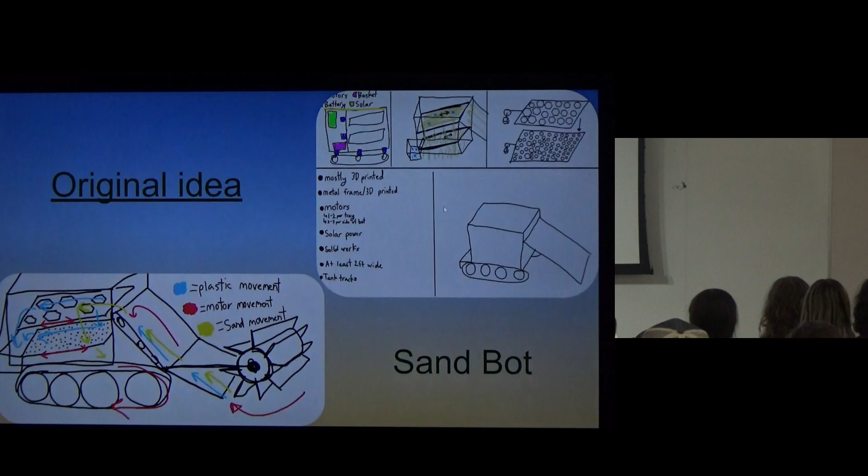This video, at the beginning of the school year, I found it on Instagram, and it was just really inspiring because I saw just how much plastic is in that, and I also found the fact that 100 million marine animals die each year from plastic waste alone, and most of that is found on the beaches before washing into the ocean. So I wanted to have a solution that could help with that.

So my original idea, I wanted to call it the Beach Bot, but that was unfortunately taken, so I wanted to name it the Sand Bot, and found that Trash Turtle was even more catchy. But originally I just wanted the idea to have a fully working robot that can drive on sand and pick up trash while dumping and leaving the sand behind.

I wanted to make it as easy as possible and least harmful for the habitat. I also wanted 2 shaking tables. My initial idea was to make 2 shaking tables that would shake and have the sand fall through while the trash goes into a bin later, but that changed.

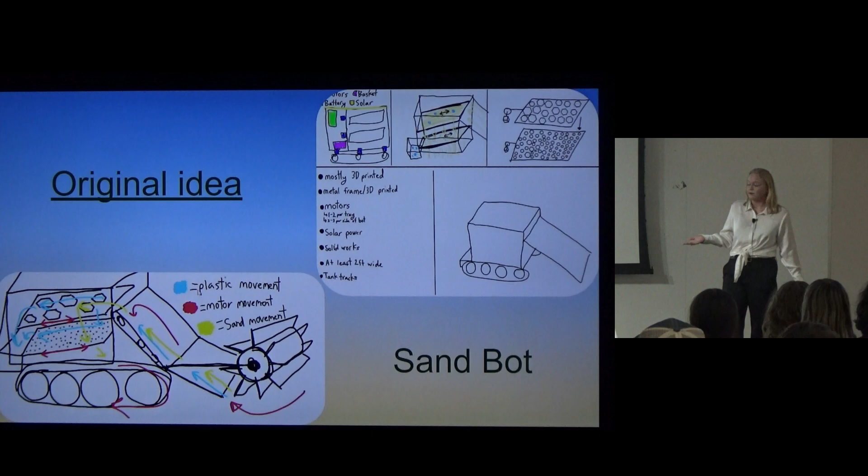So my project objectives: I wanted to build a working robot, obviously. I also wanted to learn SolidWorks and learn Python and also Arduino, because that was what I was going to be using. I wanted to build relations in the engineering and conservation world, and I also wanted to raise awareness for plastic pollution, which is what I'm doing right now as I'm talking to all of you guys. I also just in general wanted to work on my engineering skills. Even though I'm going into a marine biology major, I still want to have that aspect still in me.

Some of my research goals: again, I wanted to relearn SolidWorks, learn how to better use it and be more effective with it. I wanted to learn Python and Arduino, as I knew very little at the beginning of the year. I wanted to learn about habitat harm and how I could build a robot that would cause the least amount of damage to the habitat while still getting my goal done. And for most of the year, I spent researching suspension.

So my biggest problems: first of all, the sand, from it getting into motors and trying to find motors that could fit and have sand not get into them, to gears and shaking tables and making sure that the sand doesn't get stuck in that. Also the weight of the sand, or the weight of my robot on the sand, and making sure it can drive around while still doing that. And also just the bumps and getting over the bumps in the sand that are naturally occurring.

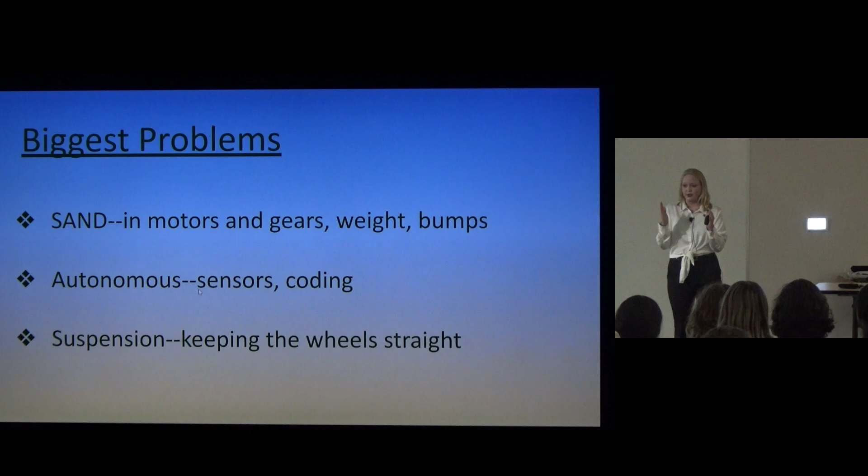Also autonomous: if I wanted to use sensors, if I wanted just to code an area for it to go around on, or if I wanted to use a joystick. And then my last biggest problem, that was actually my biggest problem throughout this year, was the suspension. Everything about it, from keeping the wheels straight so it can actually drive, to also making sure I can bear the weight of my robot.

So before, I needed a panel of advisors. My first one was Matthew Beaker. He works at Hyster-Yale and is the Director of Global Emerging Technology Products, and he's an electrical engineer major. I also have Mr. Barker, our robotics and engineering teacher at Grandview, who's also our VEX robotics coach. And then there's also Kevin Roethe.

He's an electrical engineer... he's my father, I should know this. He's also a general in the Air Force. He has done MIT AI coursework, and he coded a navigation system.

I also needed support advisors for this. I had Danny Diaz, he's at the School of Mines, a mechanical engineer who's very good at computer science. There's Corey Patheeks, a grad from University of New Hampshire, a marine, estuary, and freshwater biology major. And there's also Gwenny Dubenhugger, my German exchange student and sister, who's my emotional support buddy throughout this whole thing.

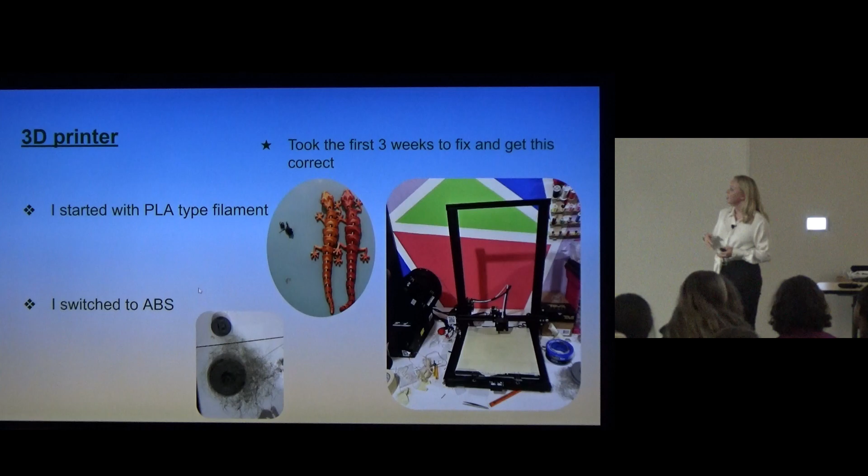But I didn't want my project to be rainbow, and I didn't want it to cost that much. So I switched to ABS, and as you can see in this lower image, it was absolute chaos. I did a little research, tried a bunch of solutions, and found out it would be better to just switch back to PLA.

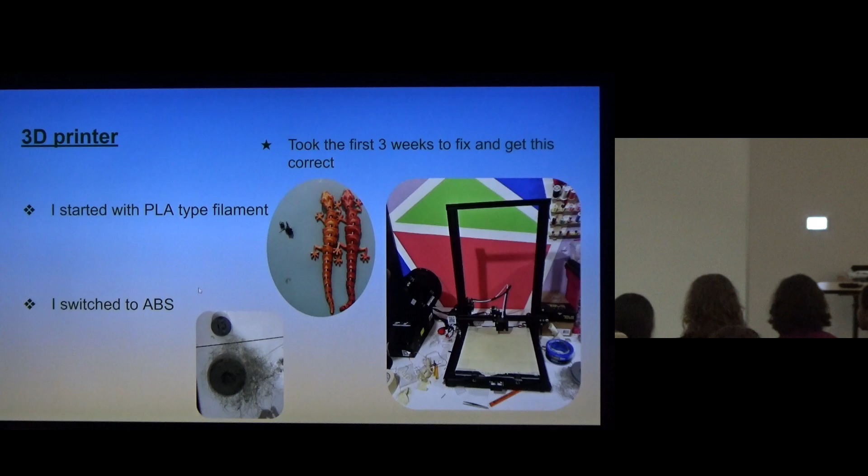So I got some PLA and did a little more research. I leveled my printer, taped it, and put Elmer's glue on the bed to help it stick, and it ended up working pretty well.

Around that same time, I was also researching suspension. My idea was to go off the remote control car I have at home, with two arms and a shock absorber to help make sure I could bear the weight while still going over bumps.

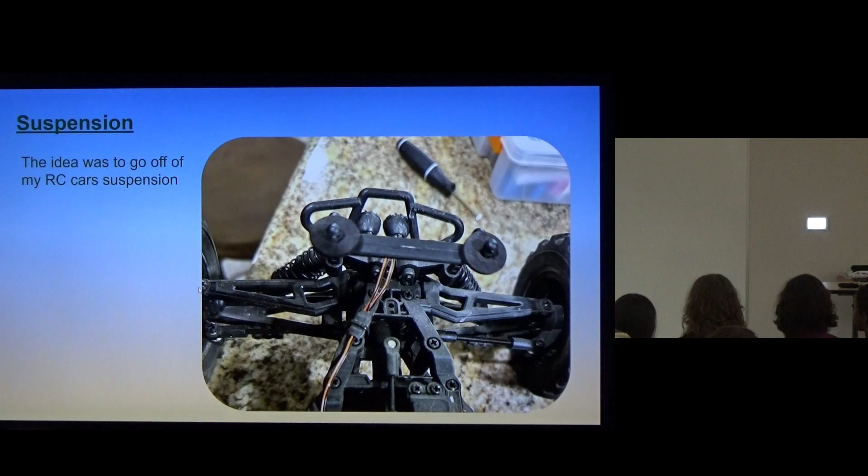So I got some initial objects to work with. I got my initial wheels with a lock nut in them, and the shock absorbers, and I went to order these arms. I wanted two for each one, but I ordered one pack, and when I went back to order another, they disappeared off the face of the internet. I could not find them anywhere, so I had to do a little figuring out, which I'll show in the next slide.

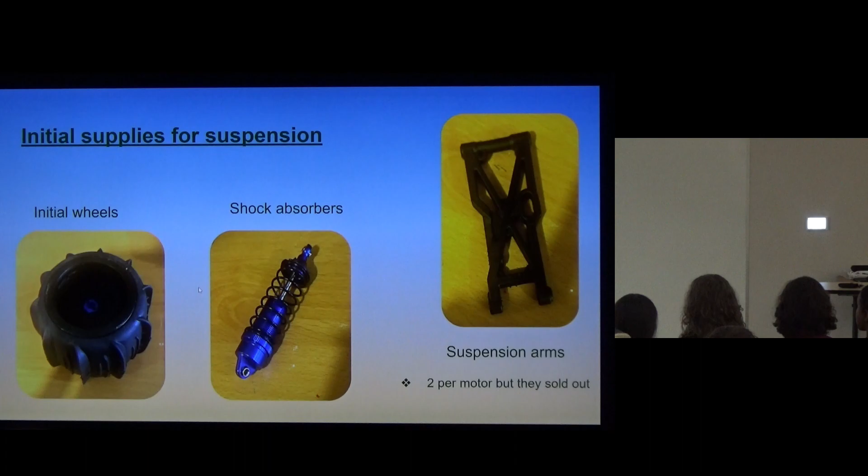I was also working on SolidWorks. I had to relearn it, and I wanted to work on the part that could hold my motor, which is right in the middle and not a great place to connect. So I had to create something that could hold the motor and connect to the suspension. My first attempt was way too thick, but I was just messing around with SolidWorks to see how it would transfer and print onto the 3D printer.

Then I went on to my second attempt and made it much thinner, and I quickly realized I needed a second point to attach a second arm to make sure those screws were level. So then I went to my third attempt, with two suspension arms, but this is when I found out I could not order the same part twice because it was gone. So I went to the final version that is actually on my robot right now, to attach to the part I did end up getting.

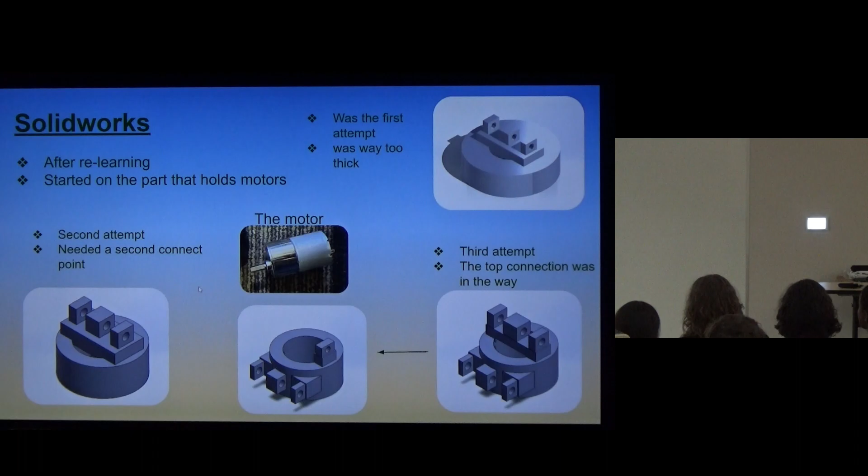So this is my initial idea for the suspension. You can see I have the shock absorber, the one arm, and that which would hold my motor. And I ended up needing a second arm, like I said.

Around the same time, I was also building my frame. I was using VEX parts because I was part of the VEX team, and I was comfortable using those parts, and also they were easily accessible at the school. I quickly realized it was also very heavy, so I needed to print almost everything else.

I also went ahead and prototyped a part for the shaking table, and knew the idea that I wanted, as you can see there.

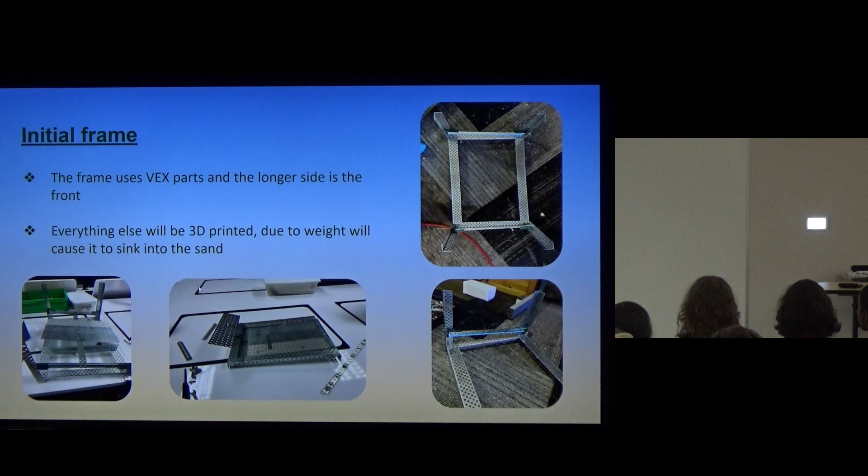Around the same time, I was jumping around a bit on my project. I was also working on the wiring. I soldered a control panel to one of the motors, attached it to an Arduino board, and got that connected to a little joystick just for testing, connected straight to the Arduino board.

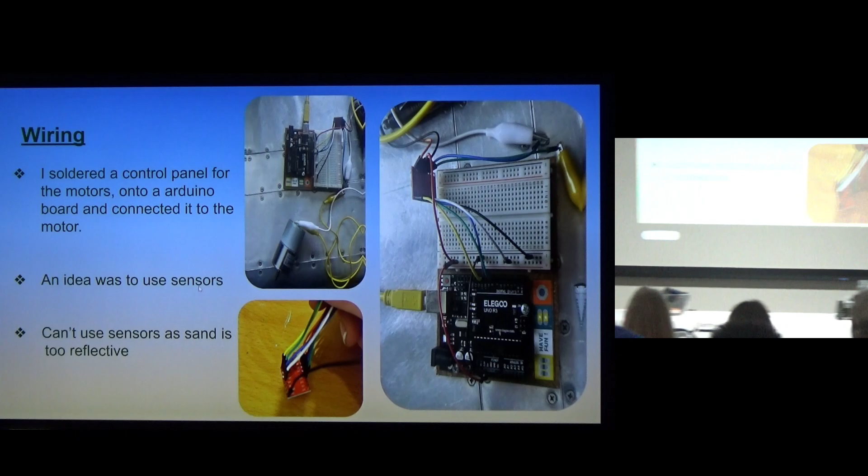I also had the idea to use sensors, so I didn't have to drive the robot around and be there. But after talking to my advisors and some research, I found out sand was very reflective, so I couldn't use any vision sensors since I'd get bad input. I also considered using GPS, but because it was the ocean and by the beach, the tides and other aspects like humans would get in the way and run into that or into the ocean.

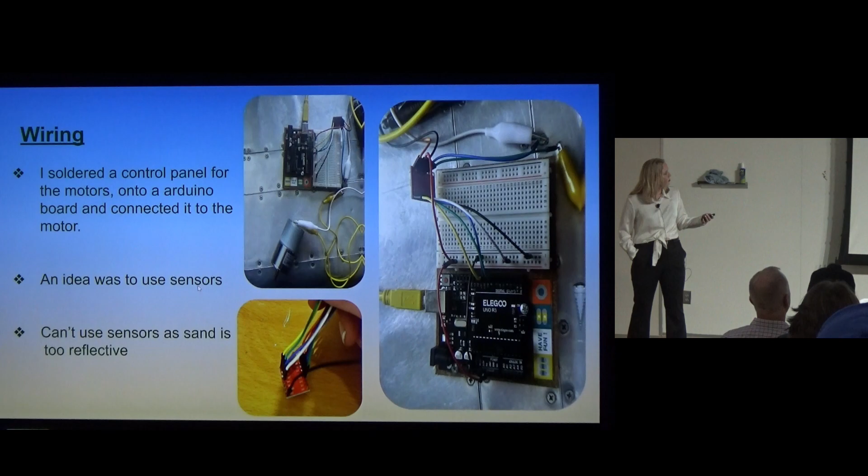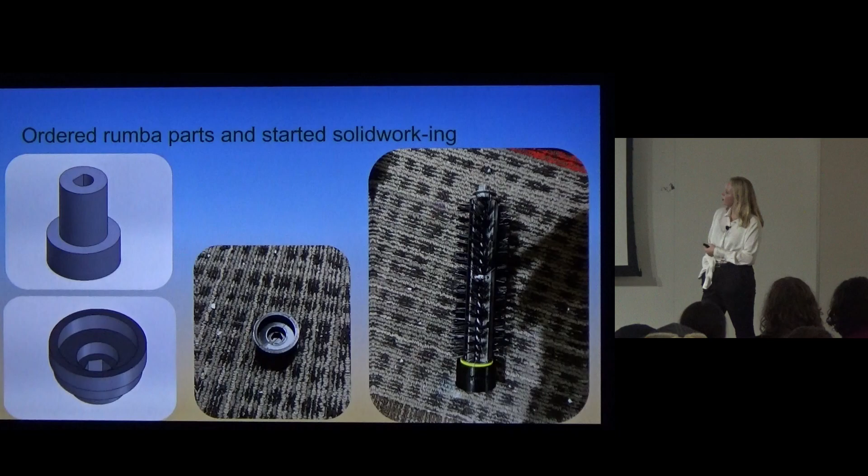Okay, don't pay attention to any of that. You saw nothing. We'll get there, there's a lot of slides here. Don't pay attention to that part. I think I was actually here.

So then, ignoring that, I went to go test it, and you can see it's moving just forward and backwards, and I was just using a little joystick.

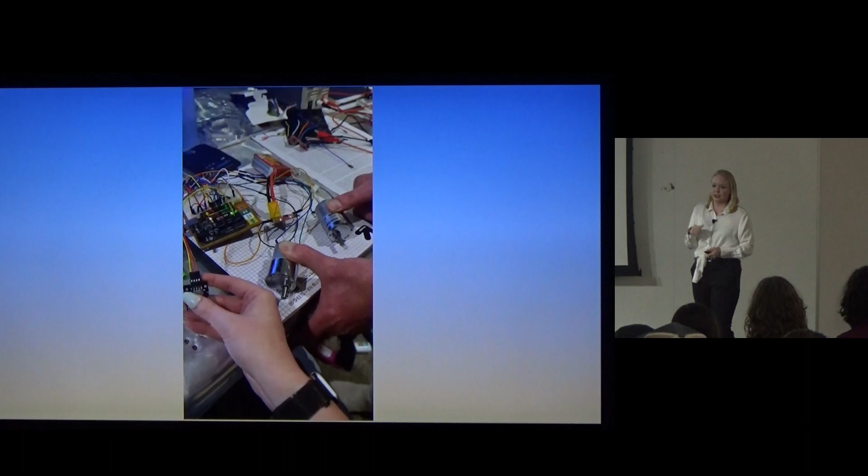Then I attached three more motors to that, and attached control panels that connected it to the Arduino board, and put it all into the suspension. As you can kind of see here, the suspension is bending inwards, which it's not supposed to do. It's supposed to stay straight, but that was another one of my big problems.

I went to go test the motors, and as you can guess, it didn't go too well. I decided to test it on the metal frame, and without thinking, I didn't take the bottom off my power distribution board, and I connected that battery straight onto the metal frame and caused it to short circuit. So the entire thing went up in smoke.

I quickly unplugged it, had a little panic attack, thought about it, and re-soldered a power control board because that's what I thought was broken. Then I went to go test it with the same exact battery, and like expected, it didn't work.

So like any normal human, I went into my room, had a quick mental breakdown, and while staring at the wall, I thought about it and realized I saw smoke coming off the battery too. So I tried a new battery, and this is what happened.

As you can see here, the motors were moving left and right, forward and backwards. You can also see I was a little scared about it touching the metal again, so I taped the entire thing. You can also see the motors are a little wobbly, but I went on to fix that in a later slide.

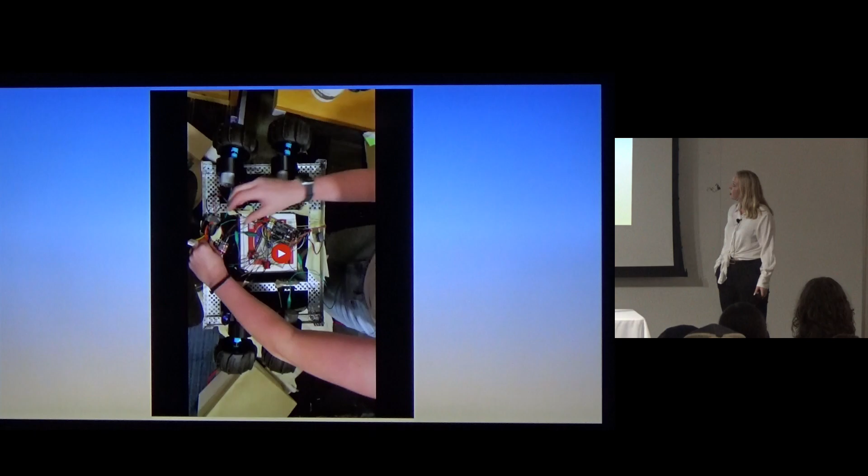So that was around midpoint, and I ran into a lot of problems. First of all, the frame wasn't big enough. The suspension ended up taking way too much space than I was originally planning, and I needed something bigger to actually have a shaking table or whatnot.

It also looked really messy. It was my first prototype, I was just kind of tinkering around, and it ended up looking pretty bad for a capstone project.

And also, as you saw in the previous slide, the suspension was not level. They were all tilted inwards, which would cause too much tension on the motor, so it wouldn't actually move it. Then there was also the logistics of the shaking table and getting sand in those joints and it not being able to work.

So then I came up with a brilliant idea. If I was going to call my robot basically a sand Roomba, I should maybe use some parts of a Roomba. So I didn't actually need a shaking table, I just needed something to sort plastic from sand. I got the idea off of a Roomba, I just needed enough brushes that the plastic would stay on top and the sand would fall through the brushes.

So I went ahead and got an actual Roomba brush from a Roomba, and I SolidWorks some parts. The top one connects to the top run right here to the motor so it can turn, and then I also connected this part right here to the bottom, as you can see in that lower picture, to hold that to the frame while it spins. That was actually my first part that I measured, printed, and got all of that done on the first try, and it fit perfectly without a millimeter to spare.

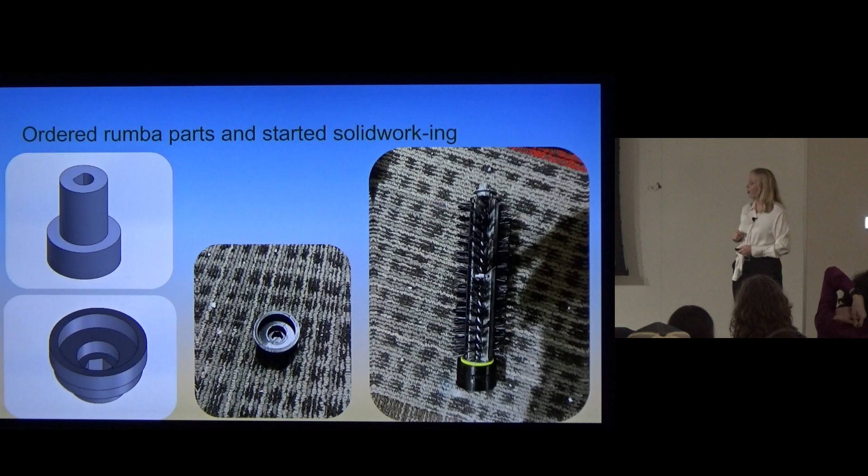I also built new suspension holders because at that point I was connecting the suspension to the robot with jewelry wire, which was not a great idea. So I 3D printed some other parts and attached them to the robot to make that suspension more stable, and got it to stay straight by keeping the two arms parallel with each other, which was a big problem at the beginning.

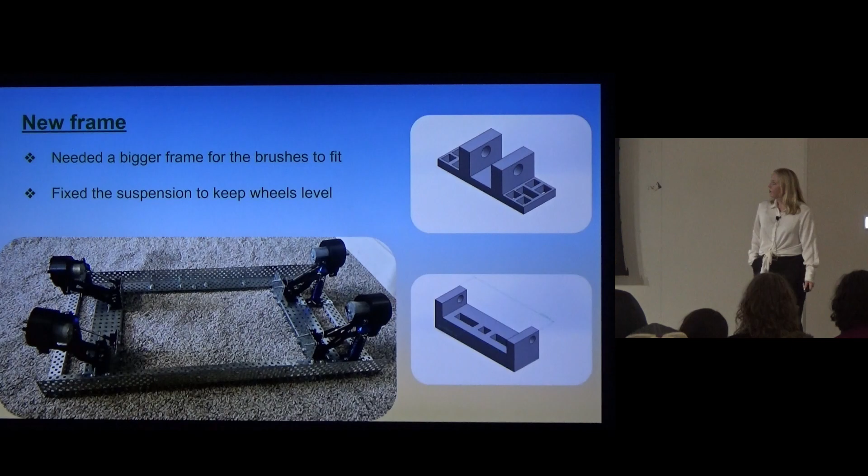So here's a video of the new suspension working with the wire, with some gorgeous music in the back.

At that point, you can see the wheels are slightly more wobbly, so I ended up getting new wheels as well, because first of all, the connection point from the motor to the wheel was wobbly, as you could see. And then also the 3D printed part that was holding the motor was about the same size as the wheel, so they were both dragging on the ground, which was not a good idea for sand.

So then I went ahead and attached the brushes. I made three because I figured that's how much space I had, and also that would be enough for the sand to drop through.

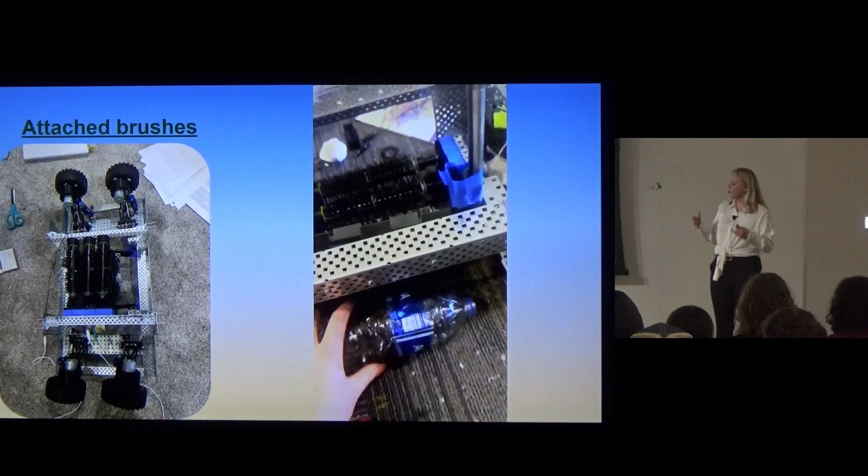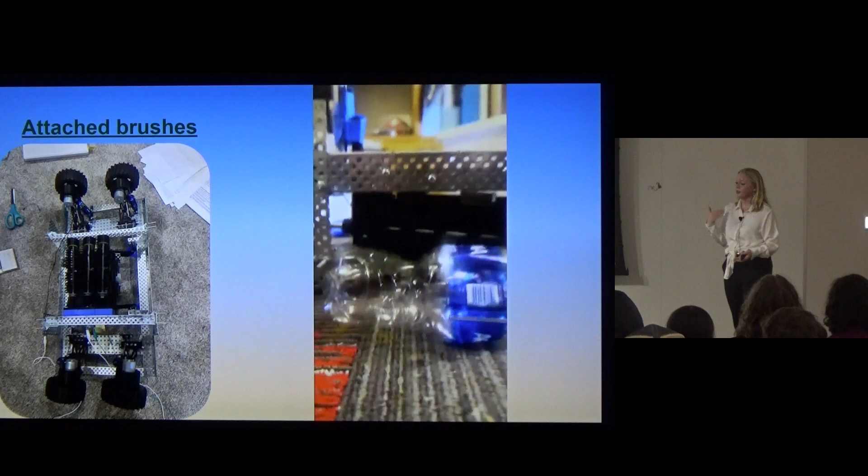Here is a video of me explaining it with my hands, just how it would look and what I wanted that bigger brush to look like, because I figured that if the brush was attached all the way at the bottom, it couldn't pick up that larger piece of trash, but if it was attached all the way at the top, it couldn't pick up all of those smaller pieces of trash. So I wanted something slightly adjustable so it could pick up different sizes of trash as well.

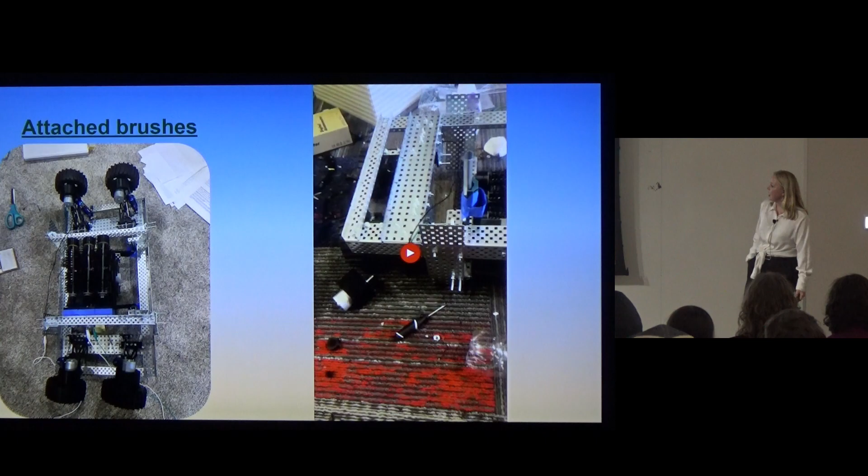And then I killed my 3D printer. Like I said, I was using it non-stop, running it and running it, and it started to mess up. I didn't really know why, so I did a little digging around and found that the bed heaters are broken. Basically on a 3D printer, the bed's supposed to be hot so that the 3D print will stick to it, and it wasn't, so it kept popping off.

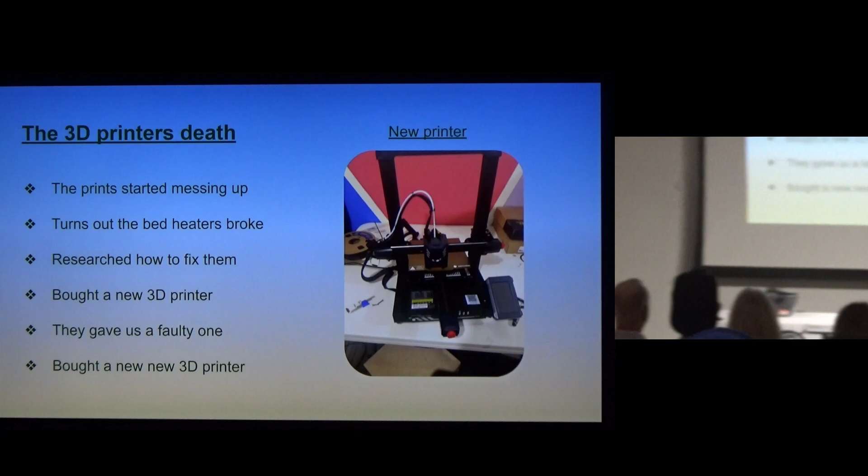And then they gave us a new 3D printer. I built it, and it didn't work. It just kept coming up with errors and malfunctions, and I was like, I swear I built this right. I did. They gave us a faulty printer. So I did some research on how to fix that, and it basically just said buy a new printer. So I did, and you can see this is the new printer over here, and it works amazingly.

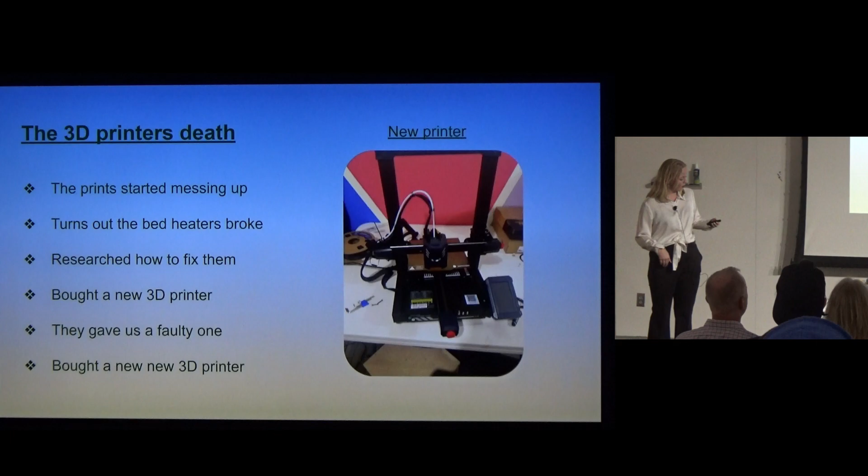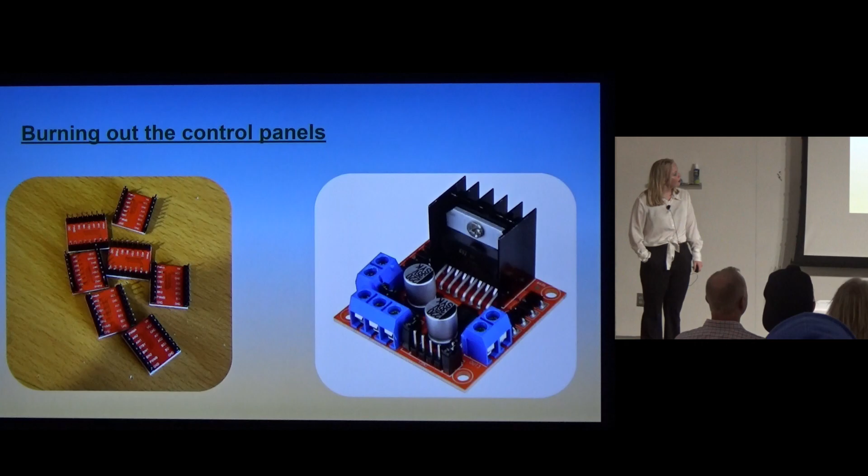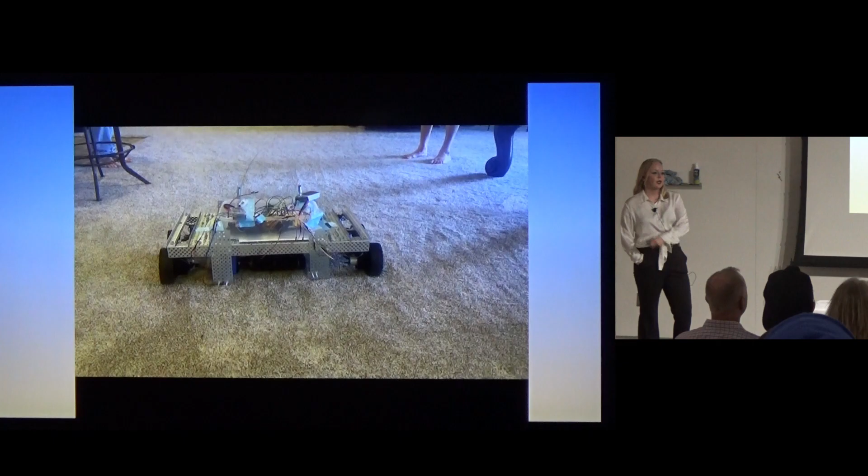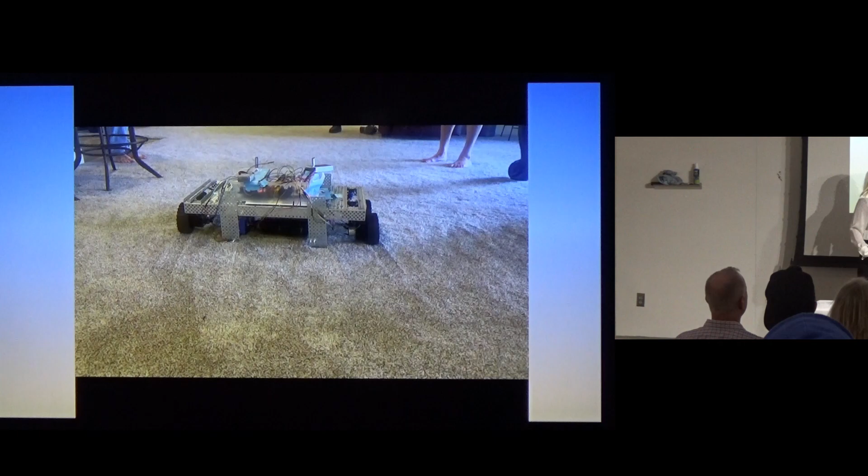As you can see here, it moves forward, backward, left, and right a little bit. And I was very impatient, so I did not attach everything. I just threw it all into a bucket and slapped it on top. It was a fire hazard, but nothing caught on fire. And then you can also see those 2 metal parts right here and here are dragging onto the floor. I did just a little bit of tinkering, basically switched that upside down and made sure that they weren't dragging on the floor anymore.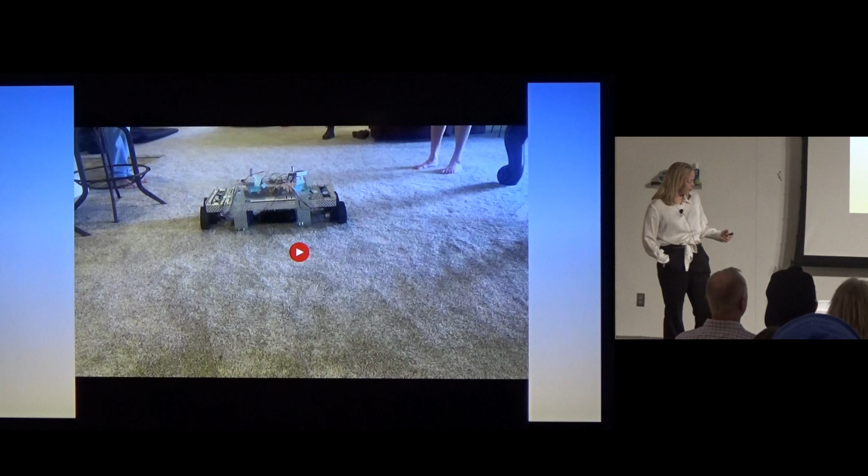So then I went to test the brushes without the robot moving. I just wanted to make sure the brushes worked. And you can see here that it picked up a little 3D printed part and got it all the way across. And I just fed it different types of plastic and different types of trash just to make sure it could pick up almost everything. And it did.

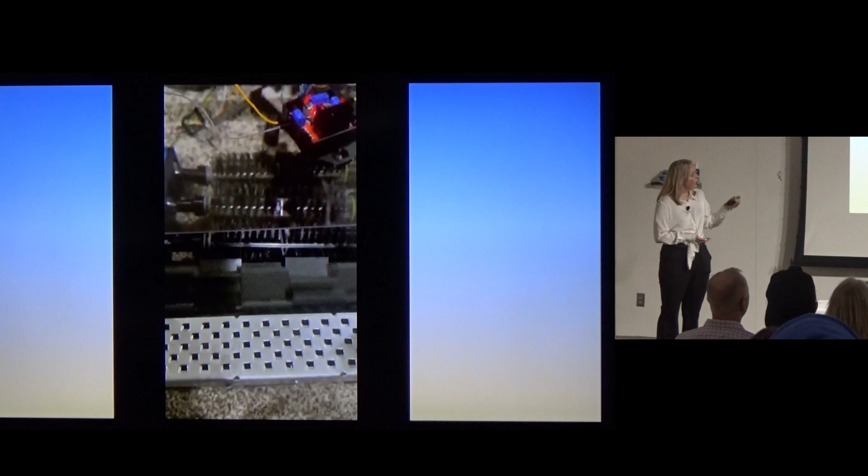So then before I show you the final result, throughout this entire project, I said that I would take 5 steps backwards and 8 steps forward. To be honest, it was a huge learning experience for myself, for this project, and also just for an engineering process as well. Some weeks it felt like I was taking 20 steps backwards and no steps forward, and some weeks it felt like I was only taking 2 steps forward instead of normal progression. It was always something to learn. As you can see, I have my bucket of fails of everything that just kind of went wrong. But in the end, it always turns out good.

So I present to you the final working trash turtle. It's fully moving, has full suspension, it can pick up trash exactly like I planned it to, and it deposits in the back with no sand, and it fully works. Yeah.

Are there any questions? Yes. Would you try to make this something that can be autonomous or at least controlled from a base station? Most definitely. This is not a finished project. I would love to expand on it and build it more, from the size to also having sensors on it so it could run without any control.

Speaking on expansion, do you plan on working on this when you're in college? I plan to, yes. I do definitely want to work on it in college, and I'm hoping to find a professor at the school or a few more advisors to help me fund and make it bigger and better.